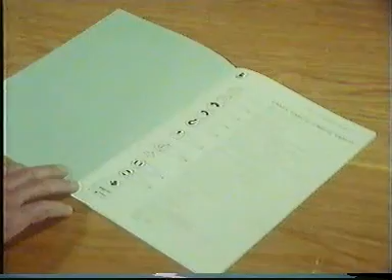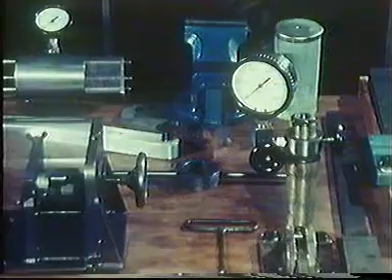Fuel valve overhauls should be carried out in a special locality where there is no risk of contamination by swarf or grit. Start by laying out the tools and checking that everything is in order, especially the working surfaces of the grinding plate and the grinding ring, etc.

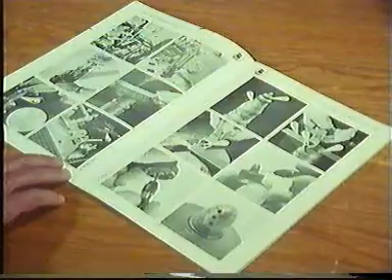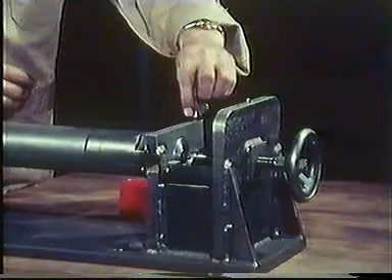The fuel valve overhaul should be carried out in a special clamping jig which is supplied with the engine. A bench vise should not be employed. Take out the adjusting screw together with the feeler pin, thrust spindle and spring.

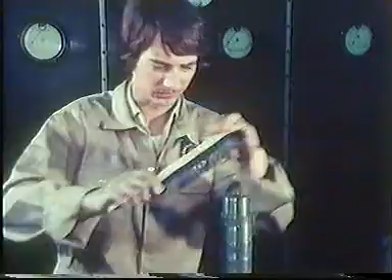Unscrew the nuts for the slit filter and remove the filter by means of the extractor tool, which is positioned by screwing it into the threaded hole provided in the filter body. Raise the valve into the vertical position and clean the nozzle with a wire brush. Before undoing the sleeve nut, any carbon deposits between the nut and the nozzle should be removed with a milling tool.

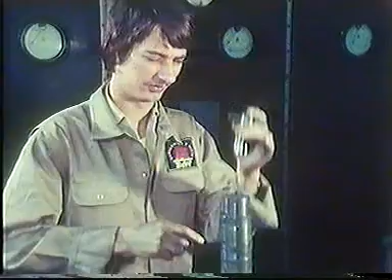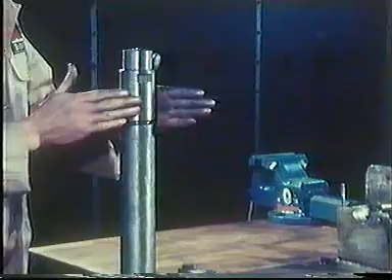Lower the valve into the horizontal position and lock it in the clamping jig. Before loosening the sleeve nut, the clamping jig thrust spindle must be tightened against the nozzle. Otherwise, the dowel pins in the nozzle or the housing might be shorn when the sleeve nut is loosened. The sleeve nut should be loosened with an impact spanner, not with a torque spanner. Remove the sleeve nut, nozzle, spindle guide assembly and rubber ring.

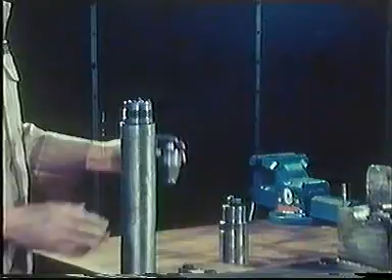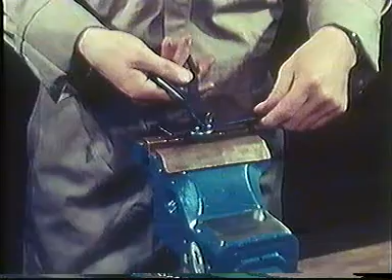Take out and scrap the dowel pins in the housing and nozzle. Remember to place a protective plate under the pliers in order not to damage the mating surfaces, which must provide a perfect oil-tight seal. The atomizer hole cleaning drills, fixtures and test pin are supplied in a separate plastic case.

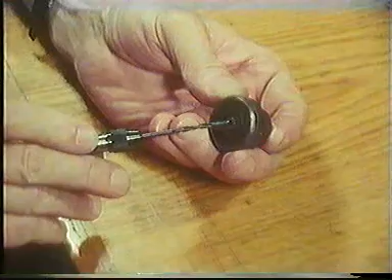During cleaning of the center hole and atomizer holes, the nozzle tip should point downwards to allow any dirt to fall out. Examine the atomizing holes by means of a magnifying glass. They must be circular and keen-edged. Having ensured that the hole geometry is in order, the dimensions are checked by means of the test pin. If the pin is able to enter one or more of the atomizing holes, the nozzle must be scrapped.

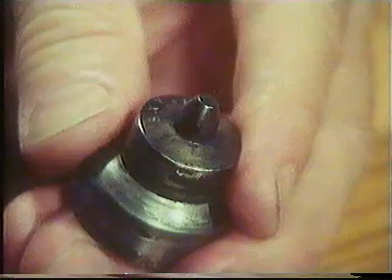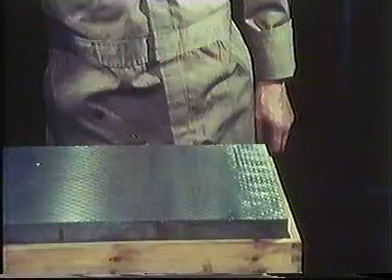The sealing face of the nozzle against the spindle guide is to be lapped on the grinding plate using emery powder number 70 and some solvent. Apply steady movement to and fro and do not turn the nozzle. Note that the nozzle is shifted to the dry part of the plate during the last few strokes.

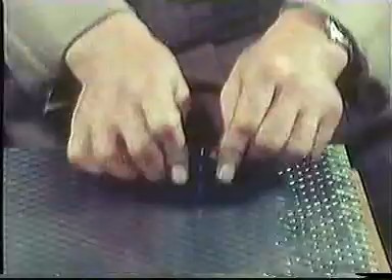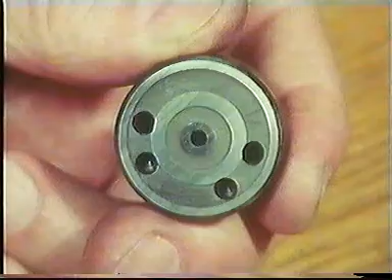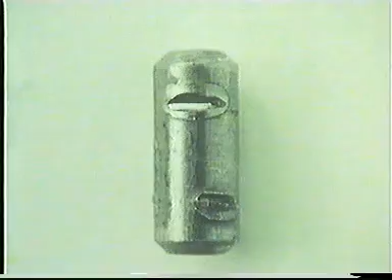After the lapping, there must be no marks or scores in the sealing surface, apart from the very fine lines that result from the lapping. Flush the nozzle through with a solvent and blow it dry with compressed air. Always fit new dowel pins. The old ones must not be used again.

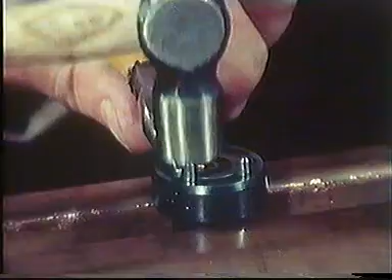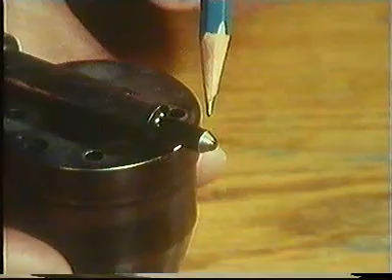Check the spindle and spindle guide. If the spindle is corroded, or if the width of the conical seat is more than approximately 0.5 millimeters, the pair must be exchanged. These parts cannot be reconditioned on board.

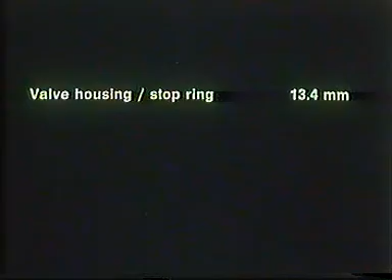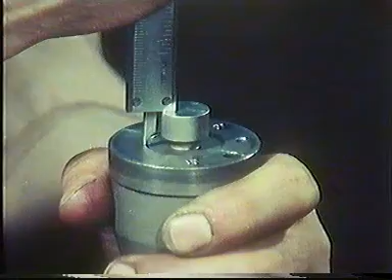The lift of the valve spindle is checked by first measuring the distance between the sealing faces of the housing and the upper edge of the stop ring. In this case, it is 13.4 millimeters. Then, secondly, the distance is measured between the top of the spindle and the sealing face of the spindle guide. Here, it is 12 millimeters. The difference indicates the lift of the spindle, which in this case is 1.4 millimeters.

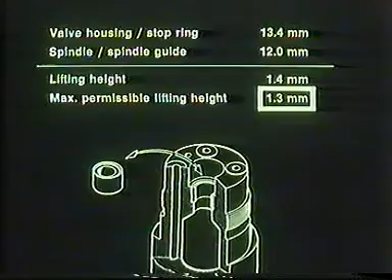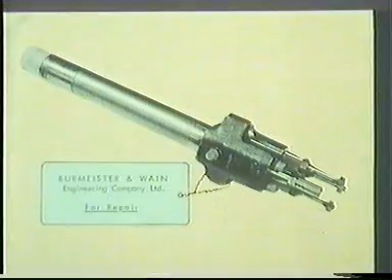For all KEF type engines, the maximum permissible value is 1.3 millimeters, and consequently the stop ring must be taken out and a new ring adapted. This job should normally not be carried out on board, but instead the housing should be sent either to Burmeister & Wain or to one of our authorized repair shops.

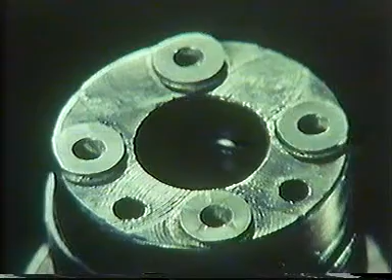If damage marks or scores are found on any of the four sealing surfaces of the housing, the spindle guide and housing must be ground to match. Before grinding, fill the apertures with Vaseline. This ensures that no grinding paste will enter them during grinding. Fit the guide ring on the housing. Using carborundum number 500, grind the spindle guide and housing to match.

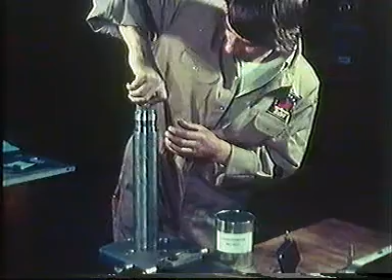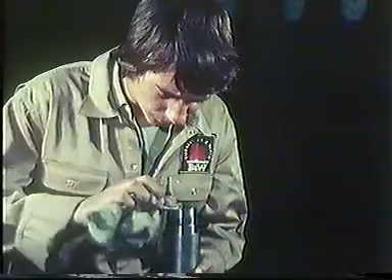After the grinding, wipe the parts carefully clean with a clean cloth and check the sealing surfaces. Lap the spindle guide in the same way as the nozzle, the last few strokes being on the dry part of the grinding plate.

After the lapping, there must be no marks or scores in the sealing surface, apart from the very fine lines from the lapping process. Flush the spindle guide through with solvent and blow it dry with compressed air.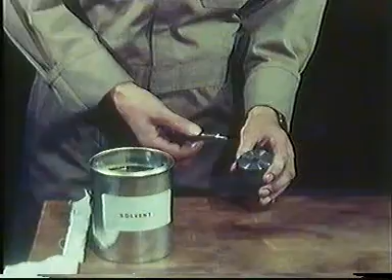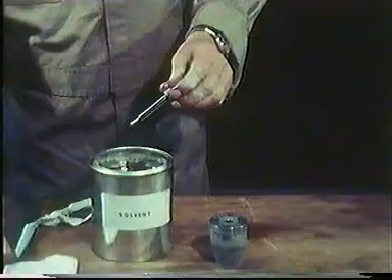Then, clean the bore of the spindle guide with a clean cloth on a small wooden stick. Wipe the spindle dry and dip it in acid-free oil before inserting it in the spindle guide.

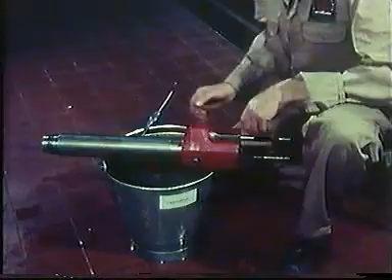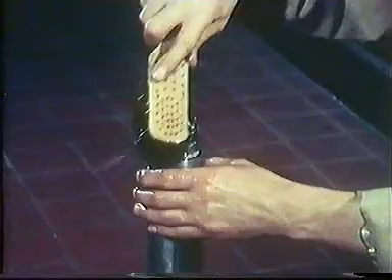Clean the housing thoroughly with kerosene and blow through with compressed air. Note the direction for blowing. Always blow from the valve head towards the nozzle end.

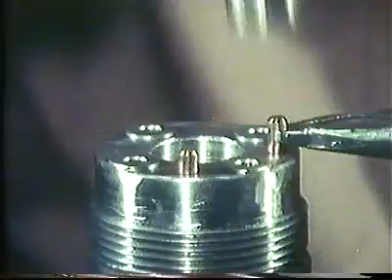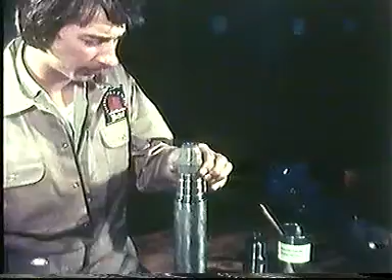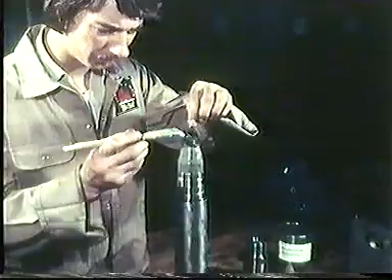Once again, remember to fit completely new dowel pins. Also fit a new rubber sealing ring between the housing and the sleeve nuts. Then, with the spindle in place, fit the spindle guide on the housing and thereafter place the nozzle on the spindle guide. The threads and pressure faces are smeared with molybdenum disulfide.

Mount the sleeve nut and tighten it lightly by hand. Lower the valve into the horizontal position in the clamping jig and lock it. Remember to tighten the clamping jig thrust spindle against the nozzle tip. This is in order to avoid shearing the dowel pins, which would result in misaligned atomizer jet directions in the engine cylinder.

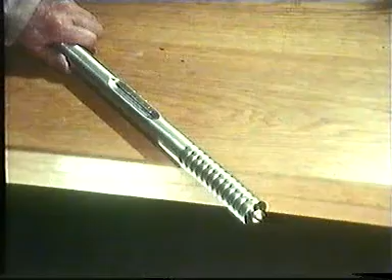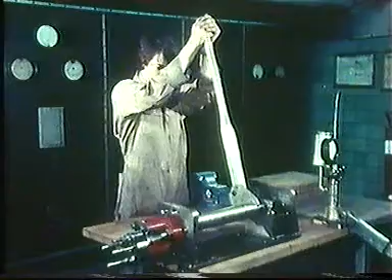The tightening torque for the sleeve nut is indicated in the data book. For the K84 type, it is 40 kilopond meters. This torque spanner will give a jolt and a click when the correct tightening torque is reached.

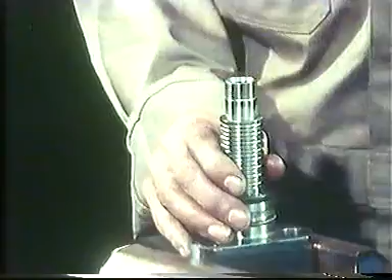Dismantle the slip filter in a vise fitted with protective jaws. Unscrew the sleeve nuts. Remove the sealing ring, spring guide and spring and take out the non-return valve disc. Take out the vent screw and remove the thrust ring.

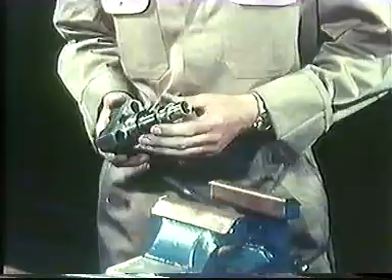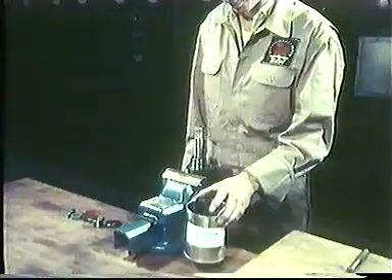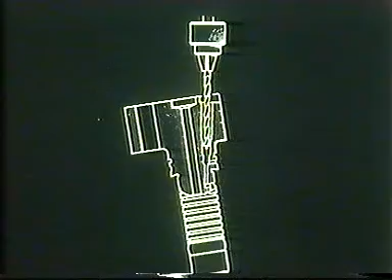If there are damage marks or scores in the valve seat, it should be ground with carborundum number 500 on the grinding mandrel supplied. If there are marks in the vent screw seating, this can be refaced with a pin drill fitted in an ordinary hand drilling machine.

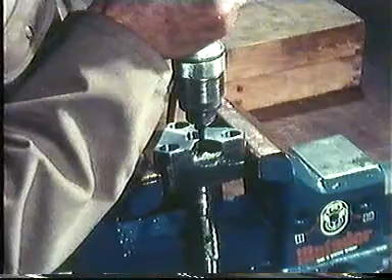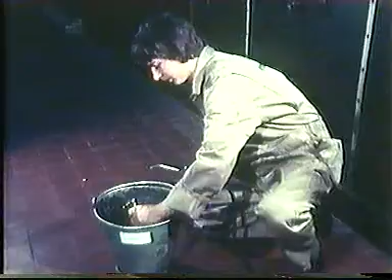After refacing the seat, the filter housing should be cleaned with kerosene and blown dry with compressed air. The disc of the non-return valve should not be reconditioned by grinding. If it is defective, it must be scrapped and a new one fitted. A convenient method of replacing the valve disc in the housing is, for instance, to stick it on the end of a pencil by using a small blob of Vaseline.

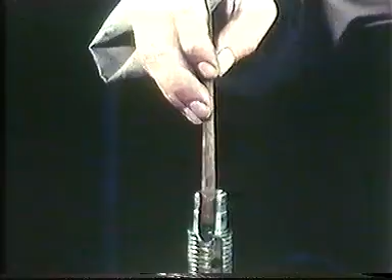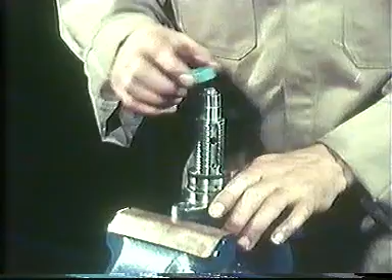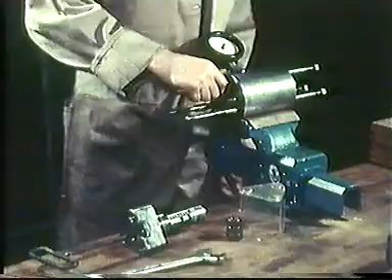Position the spring, spring guide, thrust ring, sealing ring and sleeve nut, and tighten the sleeve nut with the pin spanner. When the filter has been assembled, it should be tested in the jig supplied. Clamp the filter in the testing jig.

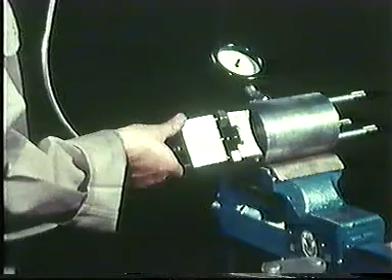Fit the pressure pipe on the filter inlet and check the opening pressure of the non-return valve. The opening pressure is stated in the data sheet. For the K84 engine, it is about 13 kilopond per square centimetre.

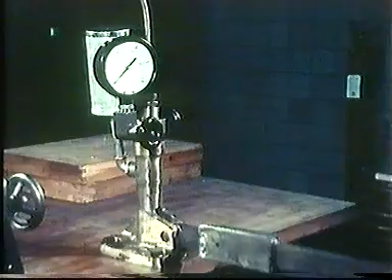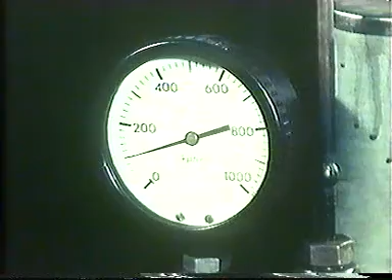When the opening pressure has been checked, the pressure pipe should be removed from the filter and the testing jig with the filter should be rotated half a turn in the vise. Then the pressure pipe should be connected to the testing jig. The non-return valve and the filter sealing ring should remain oil-tight at a pressure of 100 kilopond per square centimetre. This can be checked by ensuring that no oil leaks out at the filter inlet.

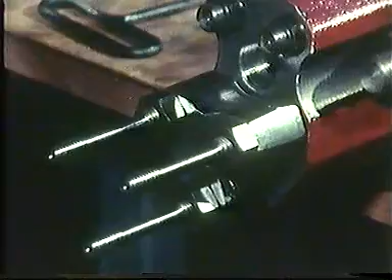Smear the filter with molybdenum disulfide and insert it in the housing. To ensure even tightening, the filter stud nuts should be tightened in 3 distinct stages with a torque spanner. The first stage is performed with a torque spanner set at a moment of 3 kilopond meters.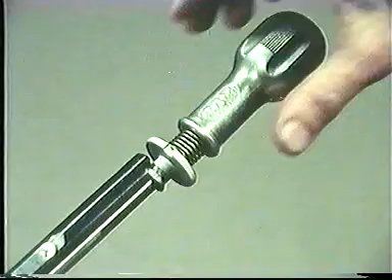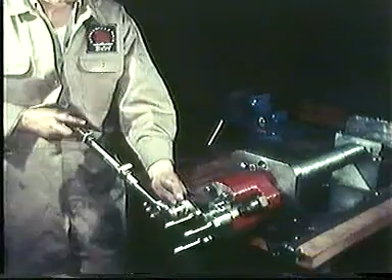Before each tightening operation, the knurled disc of the spanner should be retracted and rotated a quarter of a revolution. When the correct tightening torque has been reached, the knurled disc will be released. The second tightening stage is carried out at 6 kilopond meters. Ensure that all 3 nuts are correctly tightened at each stage. The third and final tightening is to be made at 10 kilopond meters.

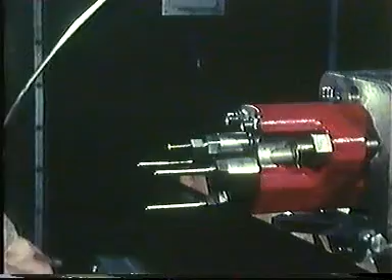Insert the spring guide, spring, thrust spindle and adjusting screw in the housing. Mount the protective guard and connect the test pump. Open the vent screw and pump until bubble-free oil flows out of the return oil outlet hole of the housing.

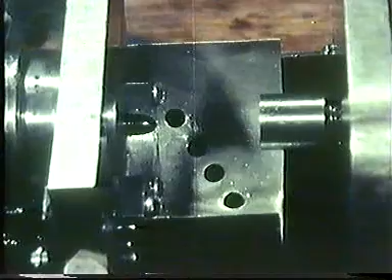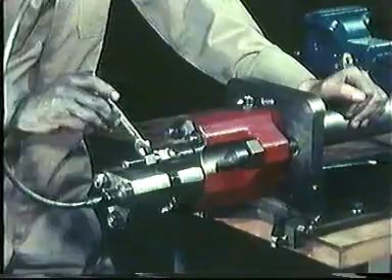Close the vent screw and pump again. The oil jets from the spray holes should then pass through the holes of the control screen. This indicates that the oil jet directions will be correct in the engine cylinder. Adjust the valve to the opening pressure stated in the testbed table. For the K84 type, it is 250 kiloponds per square centimetre.

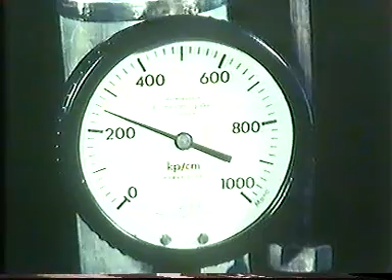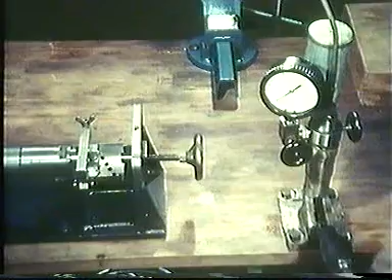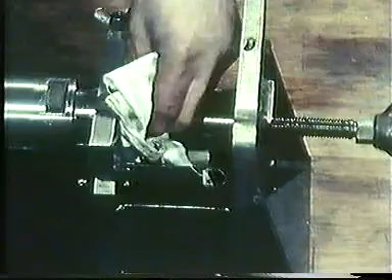When the opening pressure has been attained, tighten the adjusting screw lock nuts. Wipe the nozzle tip dry with a cloth and hold the pump pressure for a couple of minutes at 200 kiloponds per square centimetre. If the nozzle shows signs of sweating or dribbling, the valve must be dismantled and the fault traced. Before checking the atomization, the pressure gauge valve must be closed in order to protect the gauge.

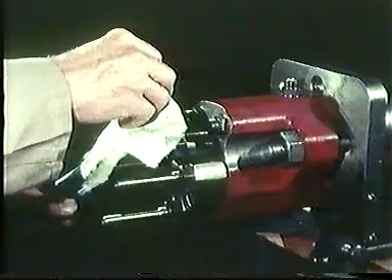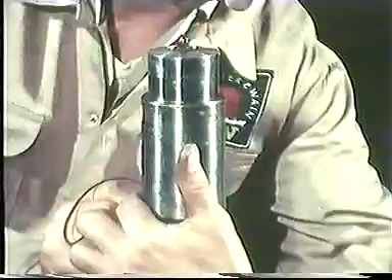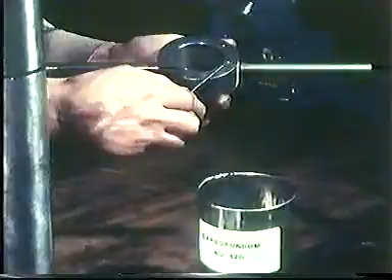Check that the cooling oil ducts are free from congestion by blowing through with compressed air. In order to enable the valve to enter the sleeve of the cylinder cover, trim off the outside projecting edges of the rubber sealing ring between the sleeve nut and the housing. Any damage on the contact face of the sleeve nut where it bears against the cylinder cover should be ground away by means of the grinding ring and carborundum number 120.

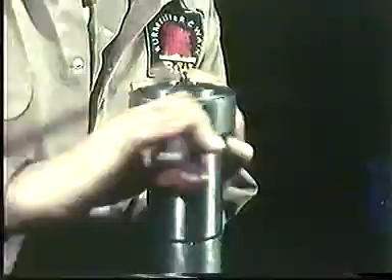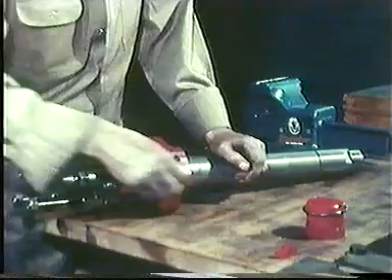When the overhaul has been completed, fit protective caps on all pipe connections and on the nozzle end, and push the rubber sealing ring into position on the valve shank. The reconditioned valve is now ready for remounting in the cylinder cover or for storage as a spare.